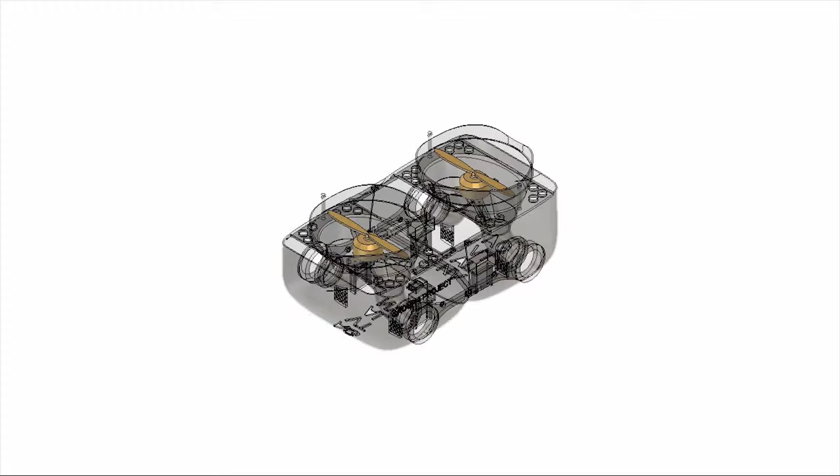The design of the drone is unique. It uses 2 propellers instead of 4 or 6 that is usually found on drones. This allows us to increase the propeller size, which increases the efficiency of the drone.

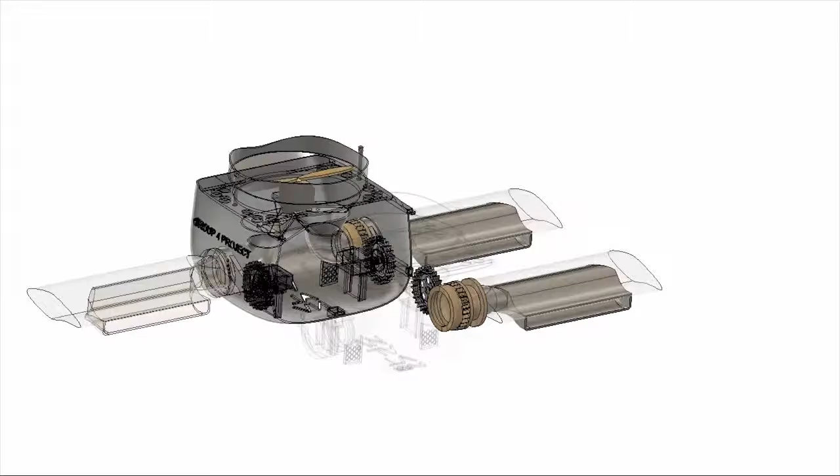As you can see, the propellers are also hidden inside the fuselage, preventing collisions with obstacles like people or trees. This means that the drone is safer in urban environments and can also be flown in areas with a lot of obstacles, for example forests.

We use the Raspberry Pi as our central source of computing power. In addition, we paired this single board computer with an Adafruit servo hat, which allowed precise access to pulse width modulation used to control the servos and motors in our design.

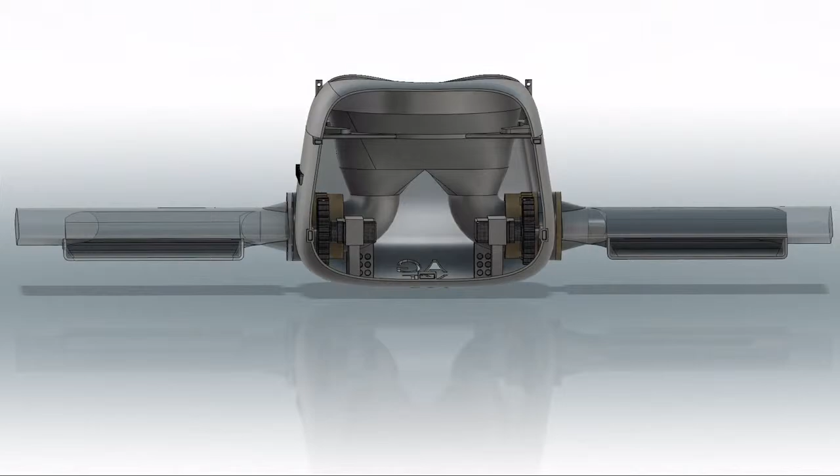Another thing that makes our drone unique is the propulsion system. Our drone uses high-speed propellers that accelerate the air through the funnels and out through the wings. By adjusting the tilt of the wings, we can control the movement, tilt, and rotation of the drone.

The tilt of the wings is controlled by microservos and gears attached to each wing. With the aid of these 4 different controllable surfaces, the drone can be controlled easily and precisely.

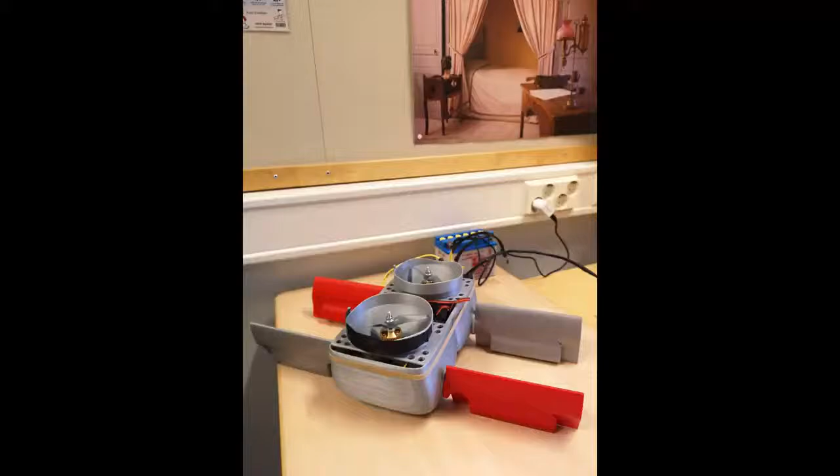A problem with modern drones is that the range isn't very good because they are controlled via remote control, which has limits, so the range is usually 3 to 4 kilometers. We also decided to go for a web-based controlling solution as it aims to provide better support for automation and theoretically provides infinite range if the Raspberry Pi would be armed with a SIM card.

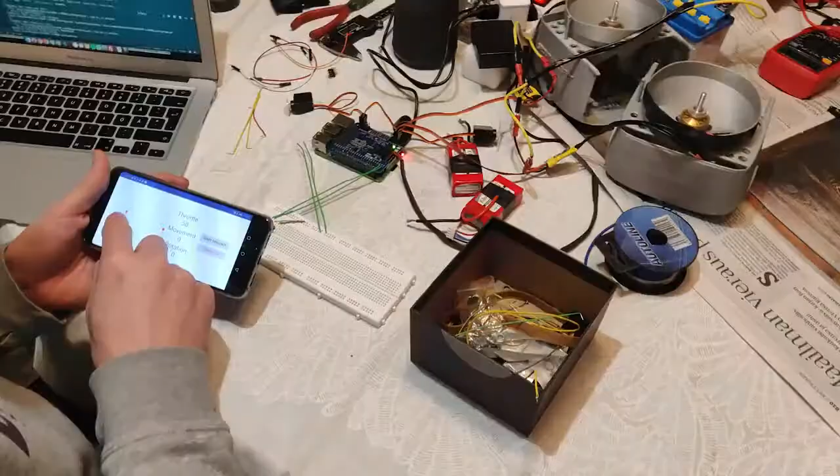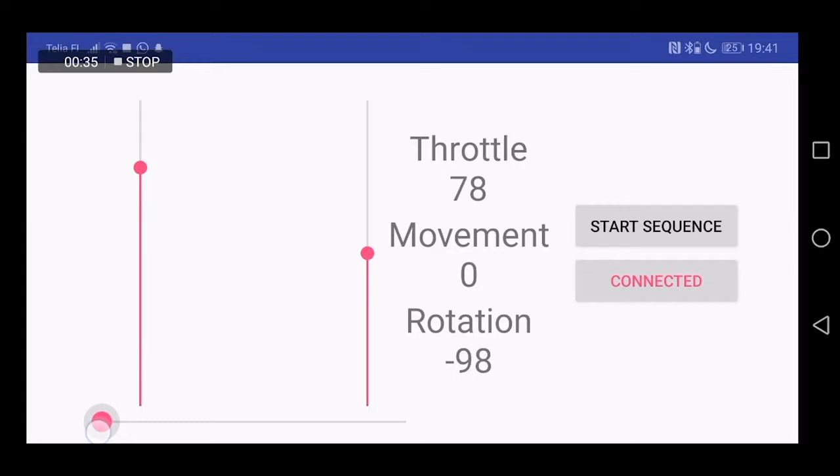Using Google's Firebase database, Python, and Android Studio, we were able to create an app on your phone used to control our drone. This abolishes the need for a traditional RC controller. Currently, it is in our interest to further develop this application to, for example, improve the automation capabilities.

In our new model of the drone, we have given solutions to these problems.